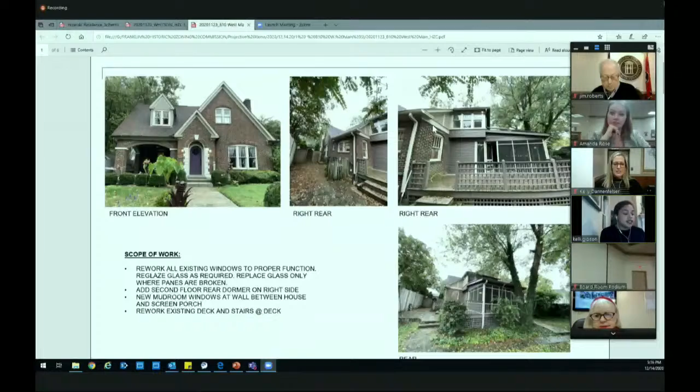The proposed shed dormer has wood siding and will include two wood windows. The dormer is located on the side elevation of the dwelling and is obscured from public view. Stylistic elements are compatible with the existing dormer located on the rear of the dwelling.

The scope of work also includes in-kind repair of existing historic wood windows and replacement of the existing rear deck and stairs. The proposed window repair and deck replacement are consistent with the guidelines, which recommend that dormers be added to rear or side elevations with minimal visibility, using designs, materials, and scale in keeping with the building character.

The proposed windows are consistent with the guidelines, which state that addition windows should relate to the window materials found on the existing structure and recommend against placing new window openings on primary or readily visible secondary elevations. The guidelines also recommend new windows have historic profiles and dimensions. The dormer design, location, and materials are consistent with the guidelines.

It is recommended that the Historic Zoning Commission approve with conditions the proposed dormer construction as follows: the windows on the dormer addition must have historic profile and dimensions and consist of either wood or a composite material with the appearance of wood. The window specifications must be approved by the preservation planner or the commission prior to issuance of a building permit. The application must meet all requirements of the Building and Neighborhood Services Department prior to issuance of a building permit, and any additional changes to the approved plans must be returned to staff or the commission for review and approval. Thank you.

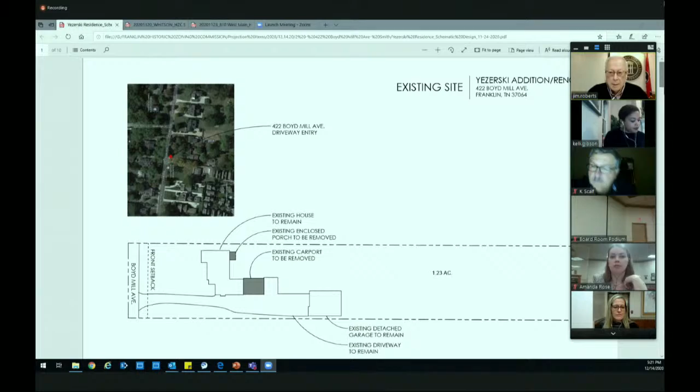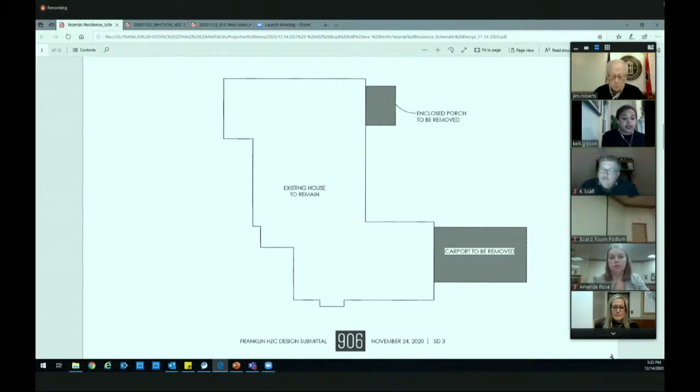The applicant is requesting a certificate of appropriateness for a series of work at 422 Boyd Mill Avenue as follows: demolition of the rear enclosed porch and carport, and a single-story addition to the rear elevation of the house. So we're going to consider the partial demolition first. The applicant appeared before the Design Review Committee at its November 16th, 2020 meeting. The proposed partial demolition consists of the existing enclosed porch and carport located on the rear elevation of the house.

The applicant included photographic documentation for the proposed partial demolition in the application materials. The construction date of the enclosed porch and carport is unknown, but these building portions do not appear to be historic. The guidelines recommend against the demolition of historic buildings and structures. In this case, the proposed demolition is limited to the porch and carport and will not have an adverse impact on the district.

It is recommended that the commission approve with conditions the proposed partial demolition as follows: the applicant must meet all requirements of the Building and Neighborhood Services Department prior to issuance of a building permit, and any additional changes to the approved plans must be returned to the commission for review and approval. Thank you.

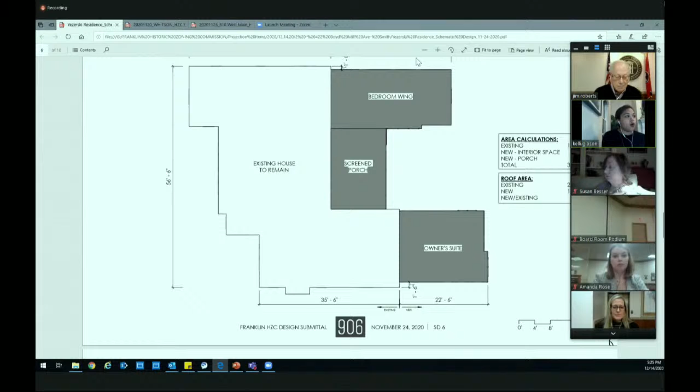The proposed addition includes new wings to the home and a screen porch. The addition will be clad in cement fiber Hardie siding with a 7-inch reveal. The addition is differentiated through a minor roof break, inset, and a material change, and includes new windows on both elevations.

The windows appear to have historic dimensions, but the applicant did not include window specifications in the application materials. Architectural details, including the windows, window grids, and trim, are consistent with the historic portion of the home. A small band of foundation brick on the addition will match closely to the color of the existing stone on the home. The addition represents a 59% increase to the existing building footprint, and the proposed building coverage is 8%.

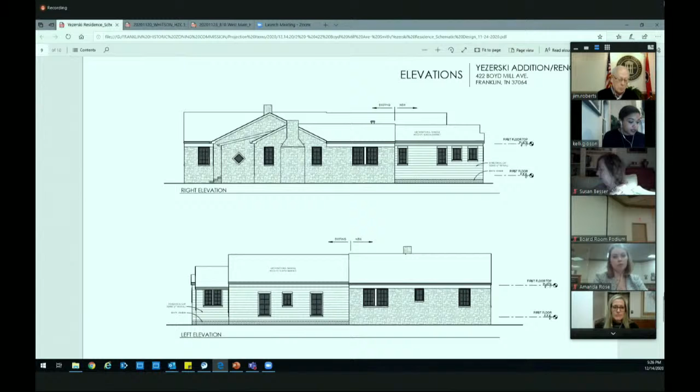The guidelines state that additions should support the historic character of the district and recommend that additions be placed on rear or obscured elevations. Furthermore, the guidelines recommend avoiding approaches that unify the existing structure and new construction into a single unified whole. Differentiating methods such as roof breaks, insets, offsets, and material changes should be incorporated into the design to separate existing construction from new construction.

The location of the addition on the rear elevation of the home and the use of building insets, a roof break, and a material change to differentiate the new addition from the historic home are consistent with the guidelines. The proposed building materials are also consistent with the guidelines, which recommend that additions be compatible with the proportions, form, materials, and details of the building.

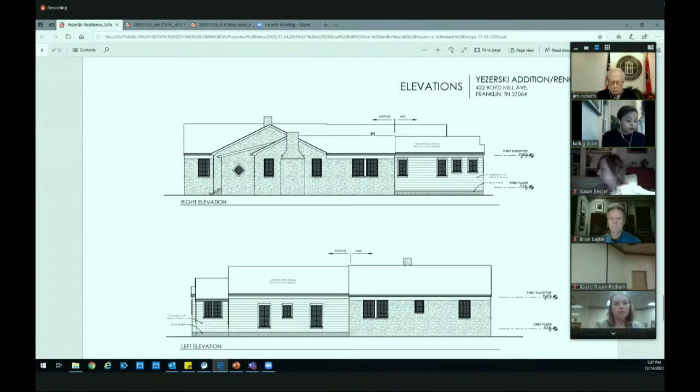Lap siding should be consistent with the principal and adjacent historic buildings. The use of a 7-inch lap reveal is mostly consistent with the guidelines, as there are examples of homes with a wider lap reveal located on the street, and the context of the neighborhood lends itself to this style of reveal.

The guidelines recommend that the square footage of additions be limited to no more than half of the existing footprint, and that maximum building coverage should not exceed 35%. The proposed addition is consistent with the guidelines for building coverage, but the footprint size, 59%, is larger than the recommended 50%. For this reason, the proposed addition size is not consistent with the guidelines.

It's recommended that the commission deny the proposed addition with the following conditions. If issued a COA, the application must meet all the requirements of the Building and Neighborhood Services Department prior to issuance of a building permit. If issued a COA, the windows must have historic profiles and dimensions and consist of either wood or a composite material with the appearance of wood. The window specifications must be approved by the preservation planner or the commission prior to issuance of a building permit, and any additional changes to the approved plans must be returned to staff or the commission for review and approval.

Thank you. Would the applicant then like to comment on this portion of the application?

Yes, sir. While the new to existing roof ratio is 59%, in excess of the recommendation of 50%, we are asking for consideration based on the following. Number one, the large lot size is 1.23 acres and a low lot area coverage ratio of 8%. This ensures ample open space around the house.

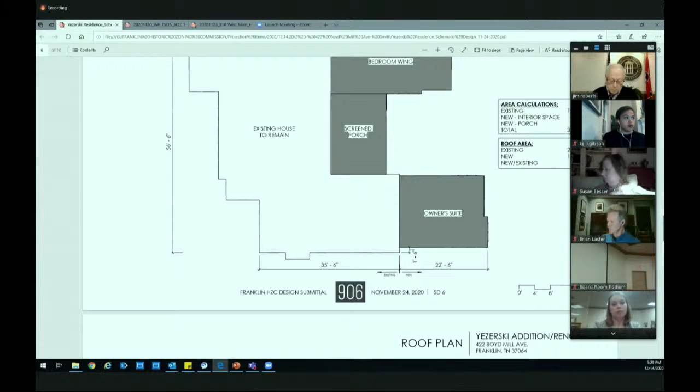The proposed addition does step back from the main house so that it is very minimally visible from the street, as you may have noticed in the proposed perspective views. The design was modified following the DRC comments in order to further differentiate the proposed new addition from the existing and to step it back from the plane of the existing house. Thirdly, the scale and design of the proposed addition is appropriate to the existing home.

With the front elevation view, no portion of the addition is visible. The owners, I've worked closely with them in developing a design. They really love living in Franklin and living in the historic center, and they look forward to continuing to raise their growing family here. I worked with them to develop a plan that complies with the spirit of the historic zoning guidelines and respects the original house, while bringing the house up to date to meet today's functional requirements. So I hope that the committee takes these points into consideration.

Thank you very much. Thank you, Matt. Are there any citizens that wish to comment on this portion of the application?

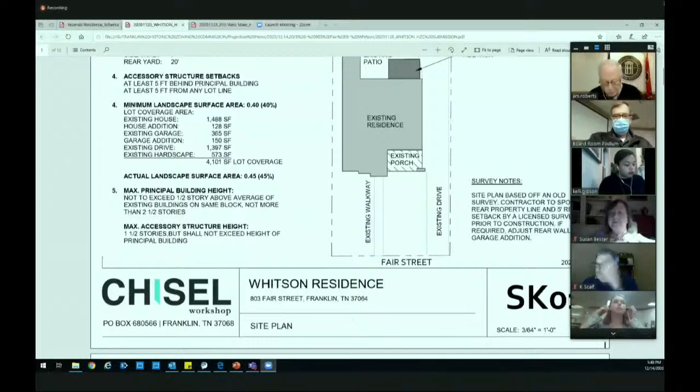So first we'll consider the additions, and then we will do the retaining wall. This is the addition to the principal building.

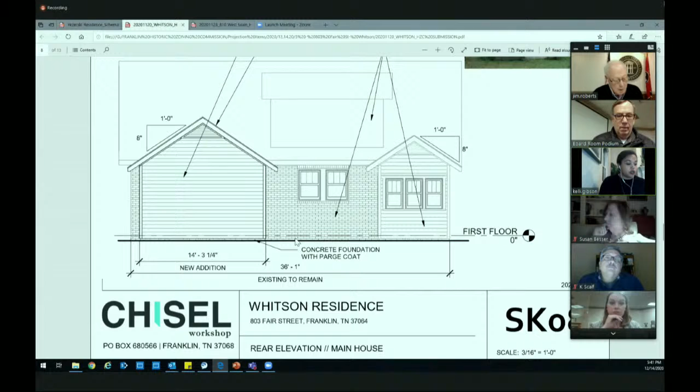The applicant proposes the construction of a single-story front gable addition on the rear elevation of the dwelling. The addition features wood siding, a concrete foundation, a single wood window, and trim detailing that match the existing house.

The guidelines state that appropriate locations for additions are on rear or obscured elevations, and recommend avoiding approaches that unify the existing structure and new construction into a single architectural whole. Furthermore, the guidelines recommend the use of differentiating methods such as roof breaks, insets, offsets, and material changes to separate existing construction from new construction.

The guidelines also recommend that addition square footage be limited to no more than half of the square footage of the historic building, and maximum building coverage should not exceed 35%. The addition is differentiated through the use of a lower roof line and a material change. The location, materials, design, and size of the addition, which is 8% of the building footprint, are consistent with the guidelines. The existing building coverage is 25%, and the proposed addition would increase the coverage to 26%. This increase is consistent with the guidelines, which recommend that building coverage not exceed 35%.

The accessory addition, here we are. The circa 1930 brick garage is located southeast of the dwelling and is a contributing structure to the historic district. The proposed single-story side addition includes a concrete foundation, wood siding, and trim details that match the existing house. The addition will also include double-hung wood windows, seen here.

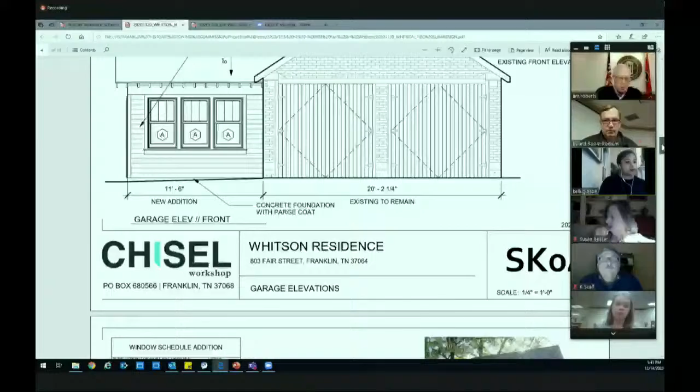The guidelines recommend that historic outbuildings be preserved and maintained, and state that appropriate locations for additions are rear or obscured elevations. The guidelines do not differentiate between the recommended percentage and scale of enclosed additions proposed on principal structures versus accessory structures, and recommend that the square footage of additions be limited to no more than half of the square footage of the historic building.

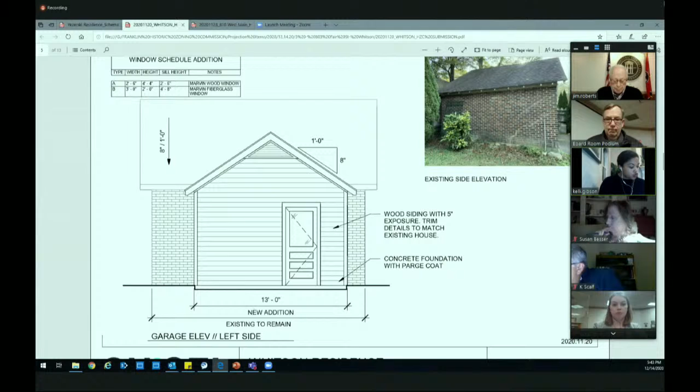The guidelines also recommend avoiding design approaches that unify the existing structure and new construction into a single architectural whole, and recommend the use of differentiating methods such as roof breaks, insets, offsets, and material changes to separate existing construction from new construction.

The proposed addition is located on a side elevation that is obscured from public view by the principal dwelling and measures 41% of the existing historic building. The addition is differentiated through a roof break, building inset, and material change. The addition's design, placement, and materials allow it to read as a distinctive form from the existing structure.

The building coverage is 25%, and the proposed accessory addition would increase the building coverage to 27%. The total proposed building coverage, including the addition to the principal structure, so everything together, is 29%. The proposed accessory addition materials, size, and design are consistent with the guidelines.

One moment. Here we are.

For the principal addition, it is recommended that the commission approve with conditions the proposed addition as follows: the windows must have historic profile and dimensions and consist of either wood or a composite material with the appearance of wood. The window specifications must be approved by the preservation planner or the commission prior to issuance of a building permit. The application must meet all requirements of the Building and Neighborhood Services Department, including standards for landscape surface area, prior to issuance of a building permit. Any additional changes to the approved plans must be returned to the commission for review and approval.

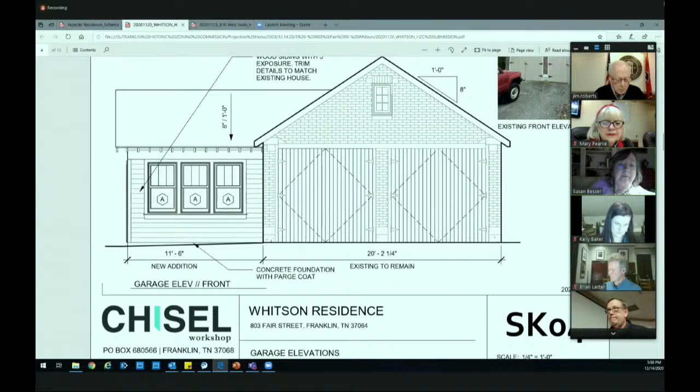I thought there was a window. Ms. Gibson, would you mind pulling up that elevation, please? Oh, I see what you...

I concur with Ms. Besser's comments. I had seen that too and wondered about it. You're not going to see it, it's just the homeowner and visitors that are going to see it. But if it were possible to break up that wall, I'd concur. Okay, that's a bathroom, right?

Mr. Whitson, you want to comment on that? Yes, we had the same concern. Actually, it will be kind of divided between where the roof pitches and that main wall. We also have a trellis used before in that location, and we can use that. There will be something appropriate and complimentary placed on that wall, with a sidewalk in front and an opportunity to grow flowers. I'm not an expert, but we have a miniature magnolia we'll put there on that trellis against the wall.

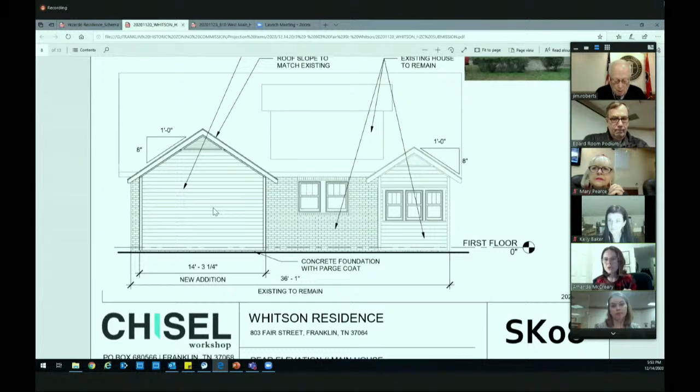Mr. Chair, this is Amanda McCreary. Can I speak for just a moment? Absolutely, please do. So, I appreciate y'all's comments. We're definitely trying to keep the addition in a very tight footprint, and by doing so, to have a tight master bathroom with universal design for aging in place. It did not lend itself to any windows on the back, so we dropped a window on the side to get some natural light in, but that was also a direct result of trying to keep it in a small footprint. If you look at one of the photos, you can see the existing trellis that Representative Whitson is discussing. So there will be some greenery and green screening to help that facade not feel so blank.

Thank you, I appreciate that. Any other comments? From a staff perspective, when I reviewed this initially upon receiving it from Ms. McCreary on behalf of the Whitsons, I noted that because it faces the rear elevation, I feel strongly it could support a window, but it wouldn't be necessary from a fenestration standpoint.

All right, thank you. Any other comments? Hearing none, I think you're ready to vote to approve as presented. Please respond when I call your name. Kelly Dannenfelser? Aye. Susan Besser? Aye. Jeff Carson? Aye. Mike Hathaway? Aye. Brian Miller? Aye. Carol Marquardt? Aye. Mary Pearce? Aye. Ken Scalf? Aye. And Jim Roberts, aye.

All right, the next piece of this is the steps in the front. Kelly Gibson? Thank you, Mr. Chair. One moment.

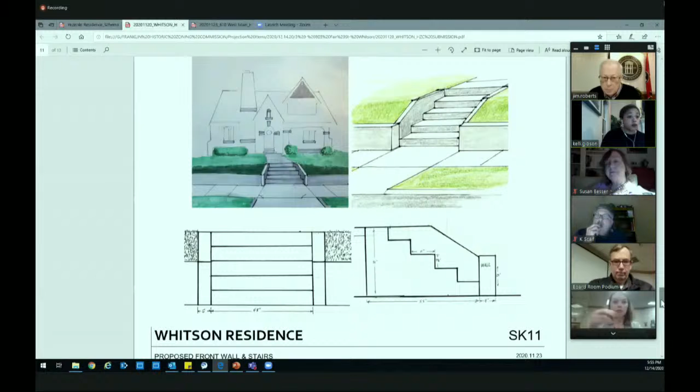The applicant has submitted photo samples of existing concrete retaining walls located within downtown Franklin, some of which are located outside of HPO. The concrete wall would be in keeping with the Tudor revival style of the home, as new brick may be difficult to match to the historic brick on the building, and stone would introduce a new material to the property. It is recommended that the commission approve with conditions the proposed retaining wall and steps as follows.

Handrails will be required to meet code's requirements. The handrails should be composed of metal for consistency with the guidelines, and the applicant shall submit the final design of the handrail to the preservation planner for review and approval. The application must meet all the requirements of the Building and Neighborhood Services Department, and any additional changes to the approved plans must be returned to the commission for review and approval.

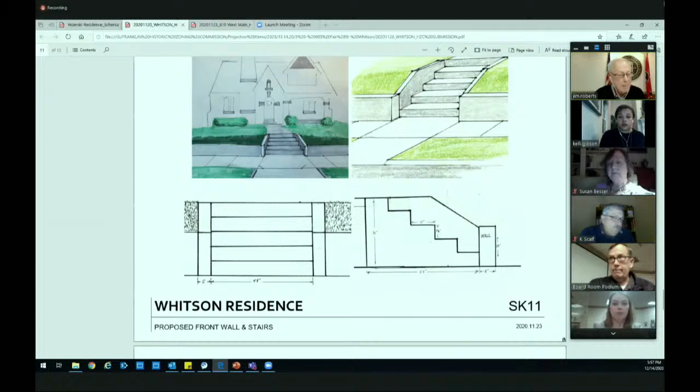Okay, would the applicant like to comment on the steps? Well, the problem, if you go with cheek walls—if you go back to the photos, I don't think any of the cheek walls that were built in the 1930s had handrails. And as you can see, the steps are wide enough. If you go back to the photos around town, you'll see that traditionally cheek walls were built with the older homes, and there's not a provision or really a way to put handrails on those. We were trying to keep this in character with the homes built back in that period in the 1930s.

Are there any citizens that wish to comment on this application, on this part of the application? All right, hearing none, then commissioners need a motion.

Mr. Chair, this is Ken. I move to approve with conditions a certificate of appropriateness for proposed retaining wall and steps. Thank you. Is there a second? Second, it's Jeff. Thank you, Jeff.

Okay, questions, comments? May I note something quickly, please? Yes, please, Amanda. I did want to mention that I completely understand Mr. Whitson's point, but unfortunately the Historic Zoning Commission wouldn't be able to supersede the hand railing condition. That would be something I would recommend that Representative Whitson work with the Building and Neighborhood Services Department to attempt to resolve. We wouldn't be able to make a condition of approval that would require that not be placed in there.

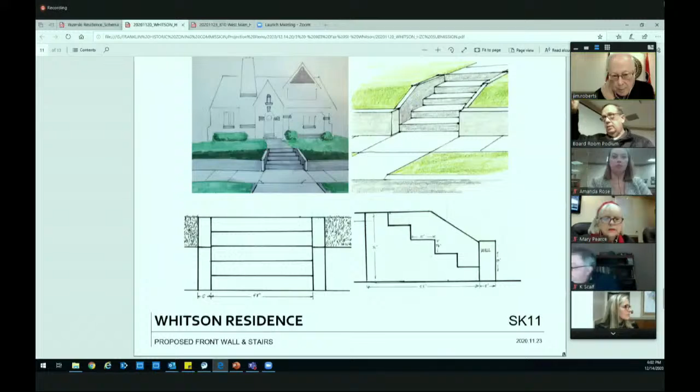All right. Are there any other comments? Yes, Mr. Chairman. Yeah, Sam.

The one reason we looked at concrete rather than stone is there's no stone on this house at all. The foundation is concrete, and I highlighted in the drawing a lot of this, you see it's either concrete or cut concrete accent to the house. Also, the structure down the street has a small 2-foot retaining wall made out of concrete, so it's kind of in keeping with the period of the house, and the concrete actually enhances it, whereas most of the stone I've seen looks new and would detract from the appearance of the house.

Okay, are there any other comments? We have a motion on the board to approve as presented. Any other comments? I have a comment, please.

We did fail to note that a capstone might need to be added to this wall, either a concrete one or perhaps even a stone one, in respect to Ms. Pearce's point, that would be more indicative of what you'd see on historic walls. But it's not a condition of approval—this is something we forgot to note.

I would concur with that. Mr. Chair, can we see a picture of the front of the house again? Kelli Gibson, can you pull up the front of the house with the front that shows the stairs as currently shown?

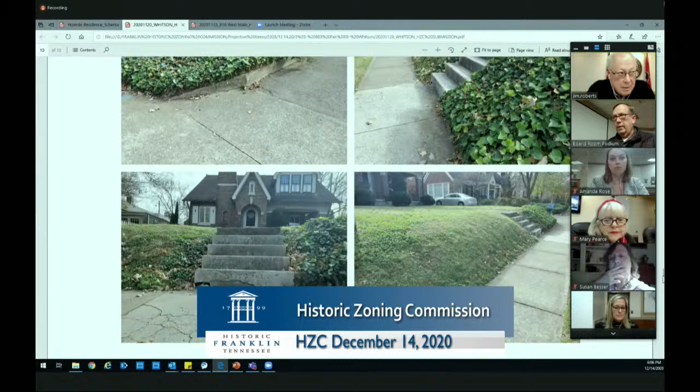Ms. Gibson, could you scroll to some of those examples that the applicant provided? You see, none of those have that. Right, they don't, and they look very modern. They don't have them, and I think they generally look very modern. I think landscaping spilling over softens and helps.

Some of those are quite old, those retaining walls that you see there. And one of them is actually a new one.

Let me ask, is it possible to separate the wall from the steps so the steps can be replaced? We can always work on the wall later. Well, I think we can put all this together. Is there any other commissioner who has any other comments?

Or is there an amendment on this capstone? Hearing none, then let's vote on the steps and the wall as presented.

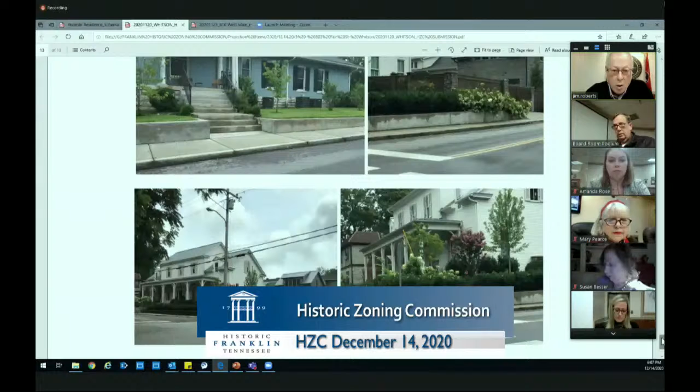So please respond when I call your name. Kelly Dannenfelser? Aye. Susan Besser? Aye. Jeff Carson? Aye. Mike Hathaway? Aye. Brian Miller? Aye. Carol Marquardt? Aye. Mary Pearce? Aye. Ken Scalf? Aye. Jim Roberts? Aye.

You're good. In clarification, that was the amendment vote? No, that's it, as presented. No, there was no amendment. That's what I was thinking. Okay, thank you.

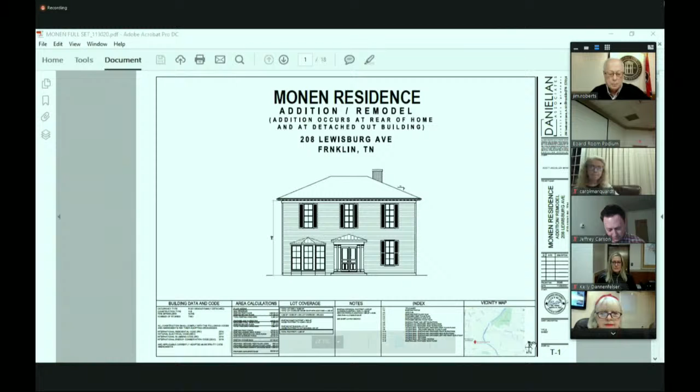Good evening, everyone. The applicant is requesting consideration of an addition to the principal structure and additions to the accessory structure, as well as some alterations at 208 Lewisburg Avenue. I'm going to share my screen. Can everyone see the screen? I'll walk through really quickly. The series of work includes the following: a one-story rear addition to the principal structure. This is the view right now, and it would be an addition reworking this area and then coming off here.

I'm sorry, I've got a little bit of an echo. I think my colleague's fixing that for me.

The construction of an upper level addition to this accessory structure, which is behind the house. You can see the rear of the house here, and the accessories over in this area. The addition would be a slight extension forward of this front wall to allow for additional living space, as well as an upper story addition across the entirety of the existing structure.

The elevation of the grade at this area, as the applicant has indicated, is a depressed condition, and they are worried about water issues here. So elevating this existing wing of the accessory structure upward in order to get it out of that depressed condition.

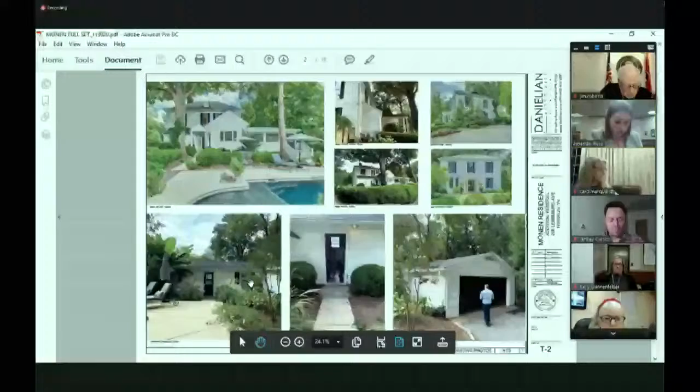The reconfiguration of the fenestration pattern on this existing building, as I'll show on the elevation set momentarily, and the replacement of the aluminum siding on both the principal structure addition area and the overall accessory structure. It is all in aluminum siding, and they would like to replace that with a smooth cementitious siding.

The guidelines recommend that additions are designed to be clearly compatible yet differentiated with the proportions, form, materials, and details of the building, and be limited to no more than 50% of the footprint of the original building. The historic building must include all portions at least 50 years in age, and it must be clearly identifiable, with its physical integrity not compromised by a new addition, through approaches that unify the existing structure and new construction into a single architectural whole.

The guidelines support the placement of additions on rear elevations or obscured elevations with limited visibility, noting however that some elevations may not be appropriate for additions as they will have visual prominence from many vantage points.

The applicant's proposing to reconfigure this area, which is an existing non-contributing shed addition at the rear, in order to provide some additional space.

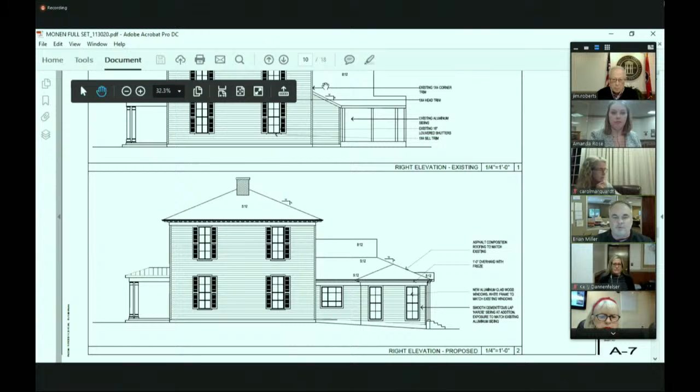Most of those will be addressed in the accessory structure we'll get to next. But we did reconfigure the space a little bit, and tried to reorient the windows that were very small, square windows, to be more in proportion with the historic nature of the existing home, with very simple massing.

Part of that was flipping some of the interior spaces. Whereas before the master only had a single historic window, which we did not want to impact, that has now become the zone of the bathroom closet so that the master could be at the rear, capitalizing on the views and allowing us to use larger proportional windows that worked for the bedroom versus the bathroom. All in all, it was an improvement to the design.

And I think it accommodated some of the concerns of a few of the commissioners. Would you like me to make the recommendation for a motion? Yeah, that'd be great. Okay, thank you.

It is recommended that the commission approve with conditions the principal structure addition. The windows for the addition must have historic profile and dimension and consist of either wood or composite material emulative of wood, and those specifications must be submitted to staff for review and approval prior to issuance of any permits. The foundation material specifications must also be submitted to staff for review and approval in light of the guidelines prior to issuance of a permit, and must meet all requirements of the BNS department. Any changes must be returned to the preservation planner or the Historic Zoning Commission prior to work commencing for review and approval.

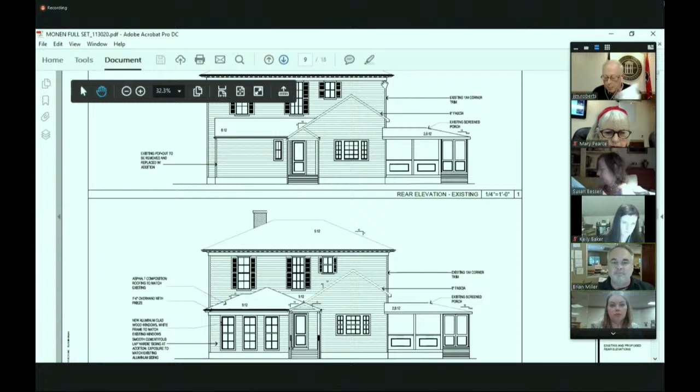Amanda, you might be able to go to the last sheet, which is a roof plan. Or whoever has control, I'm sorry. Amanda's got it, keep going all the way to the very last page, I believe it is. Kind of threw them in at the end. Here you'll see in the bottom right corner that articulation of the hip that pulls forward steps back before it hits the main structure, so the roof does not stick forward of where it engages it. If that helps understand the condition.

Very helpful, thank you. Yeah, we certainly don't want the roof standing proud of that from the front view. All right, any other questions?

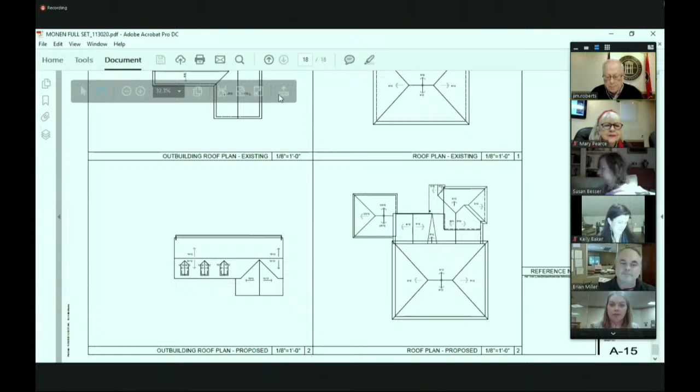We're ready to vote then on the principal structure. We've got a motion to approve as presented. So just please respond when I call your name. Kelly Baker - Aye. Susan Besser - Aye. Jeff Carson - Aye. Mike Hathaway - Aye. Brian Miller - Aye. Lisa Marquardt - Aye. Mary Pearce - Aye. Ken Scalf - Aye. And Jim Roberts - Aye.

All right. Now we're on to the accessory building. Amanda, it's back to you. Yes, thank you. So as far as the accessory, I'm going to share my screen again so I can help explain as we go along. Just a moment.

The subject accessory structure is of circa 1970 construction and is not currently contributing to the Lewisburg Avenue Historic District in age, although it is pretty diminutive as far as the design goes currently. In the case of alterations to non-contributing buildings, the alterations are reviewed in light of the guidelines, specifically in relation to how the proposed alterations would impact the character of the district and the surrounding structures.

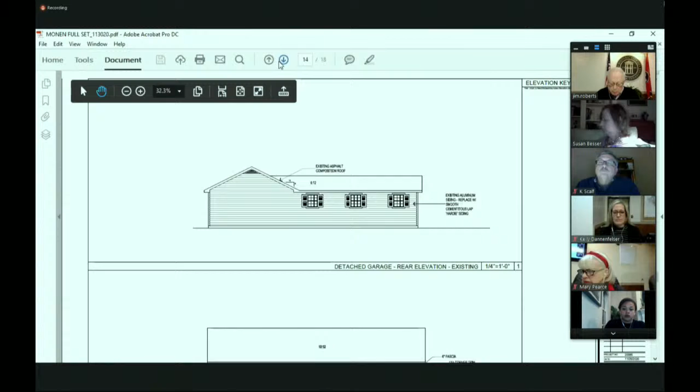The proposal is being discussed in two different portions. The structure is configured in an L shape, which is a little difficult to see here, but this is a wing and this is a gable front that projects outward. I can go to the roof plan just to show you quickly. Here's the wing, here's the garage portion that extends outward. So because of that, I'm speaking to it in a couple of different ways.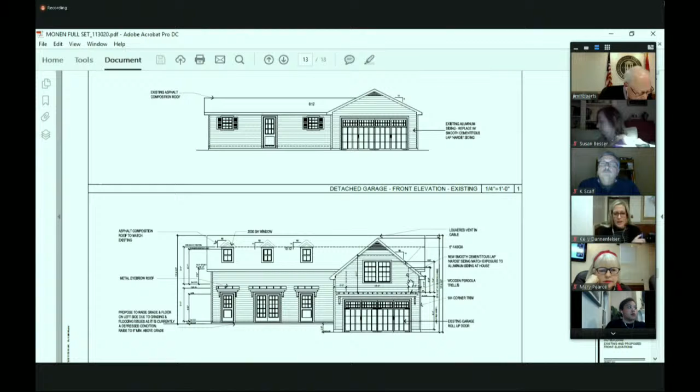The proposed addition would consist of the side-facing portion with the 3 front-facing gable dormers that you see here on the quote-unquote wing portion, and then the other portion is a front-facing gable that you see here over the garage.

So in discussing the wing portion with the side-facing gable, this addition proposes some linear square footage both upward and lower on the ground level. The lower enclosed area was previously discussed at a DRC meeting as being a proposed porch, so the upper story would cantilever over, creating a porch underneath, but it has since been enclosed due to concerns about the porch itself.

So this portion of the building is proposed at a height overall from grade to here of 21 feet, 8.5 inches as viewed from the street. The applicant has indicated that he would like to raise this floor on the wing side only to address a grading issue, and 8 inches of elevation has been included in the calculation in order to address that.

The structure will read full height from the rear elevation, so 21 and 8.5 here. If you go to the rear elevation, you will read it full height, and I will show you why - you can see the raising of the conditions here. So it will read shorter from the front than it does from the rear.

While the dormers are only set back 1 foot from the front wall - you can see the applicant's called out 1 foot from the front wall and then 1 foot from the eave that extends outward - this is contrary to the recommendations of the guidelines, which say that dormers be set back 2 feet as a minimum from the exterior wall. They do help reinforce the scale of this portion of the addition as a 1.5 story form.

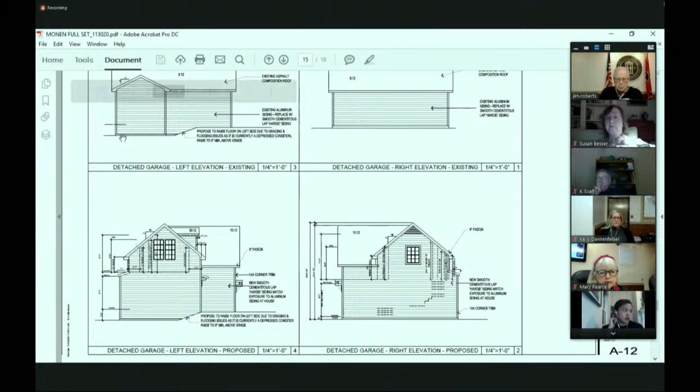We'll go back to the front again. This thus emphasizes the subservient relationship between the accessory structure and the principal structure it serves, which is a 2-story structure. The removal of the previously discussed porch is appropriate, as this modification lessens the building's overall appearance as a secondary principal structure on the lot.

As for the front-facing gable over the garage, this portion measures 23 feet, 8.5 inches to ridge, so there's about a 2 foot difference here where this is being elevated. As such, the overall building is approximately 8.5 feet shorter than the principal structure, and the overall decrease in height from what was previously submitted is about 4 feet.

The proposed upper story addition's scale and height are lessened by the removal of the gable form from the rear elevation, which I will show here, as the applicant had originally had a gable form here. But with that removed, it does lessen the perceived height of the elevation and will lessen the structure's presence for adjacent buildings on the street behind Adams Street.

Both portions of the proposed addition are inset from the facade by 2 feet in order to comply with zoning setback requirements. So here you see a slight inset from the existing wall upward, because the property is 3 feet off the property line, or the building is 3 feet off the property line, and setback requirements require that any new construction be 5 feet off the property line.

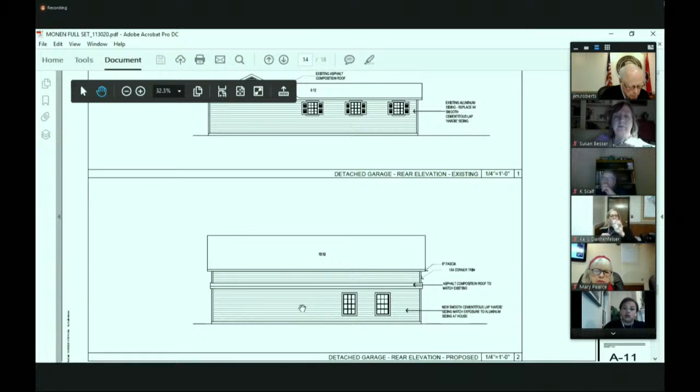The applicant is proposing to utilize siding to lessen the foundation appearance from the rear. So the siding will go all the way down to the necessary requirement here, which is probably 18 inches.

The applicant is also proposing to remove this aluminum siding from the entirety of the structure. Because this is a non-contributing structure, its removal and replacement with cementitious siding, as I discussed for the principal structure, is appropriate. The fenestration pattern is proposed to be altered overall, the entirety of the structure. As a non-contributing structure, these alterations are appropriate.

The general rhythm and spacing of the proposed fenestration are mostly in keeping with the intent of the guidelines, though the use of multiple doors on the front face does continue to cause some potential consideration of this as a secondary principal structure, however.

The use of the cement board siding, asphalt shingle roofing, are all consistent with the guidelines. The exact window, door, and roofing specifications have not been submitted for consideration, however. When I say roofing, I think I misspoke, because it is indicated to be asphalt shingle.

The wooden pergola proposed on the front-facing gable portion above the garage door is in keeping with previous approvals by the commission, and its placement helps break up the mass of the front-facing gabled form. The use of standing seam metal for the eyebrow roof material would be appropriate and consistent with the district and surrounding area.

All right, other questions? Mr. Chair, this is Susan. I don't have this elevation from when we talked about this before, so I don't know exactly what was changed. But what I did hear was that the roof line was lowered, and I'm still feeling that it reads like a principal dwelling. But I do acknowledge that it has been changed quite a bit. Yes, it's been lowered 3 feet 4 inches. I've got the original in front of me too. Okay, thank you, the original drawing.

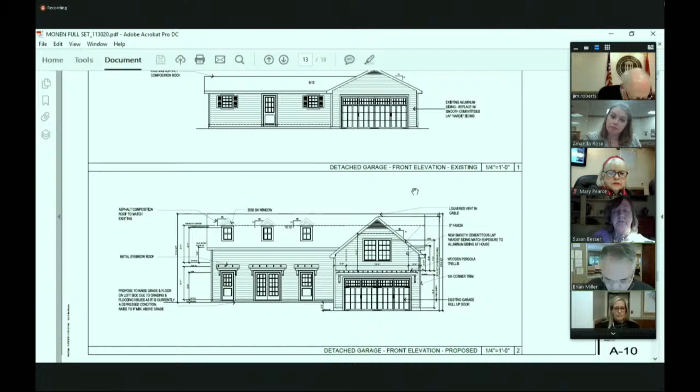What is the square footage of this structure compared to the historic home? Do we have that somewhere, Amanda? I did not include that, but Mr. Miller can speak to it. Correct, the existing square footage of the primary residence is 3,463 square feet, and the garage as it was before was 971 square feet. The addition we're proposing, both first and second floor, is 1,446. So in aggregate, it's less than half the size of the main residence.

So let me make sure I understand - that 1,446 then includes the existing garage, right? Absolutely, that's in total. So we're adding about almost 500 square feet to the structure, both the second floor and the first floor. Does that answer, Mary? It does. It's somewhat concerning because it's probably as large as the houses on Adams Street, but in the complete context of everything, I think this is going to work okay.

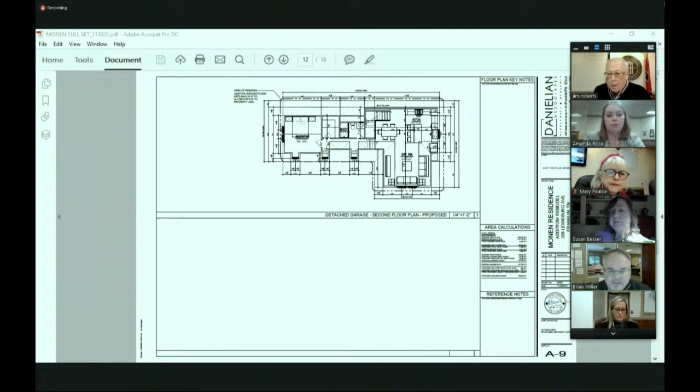Thank you. I think there was a front elevation view where it's quite obscured from the street. And the neighbor to the left has an accessory structure that's actually very similar in scale, so we've tried to keep that in mind.

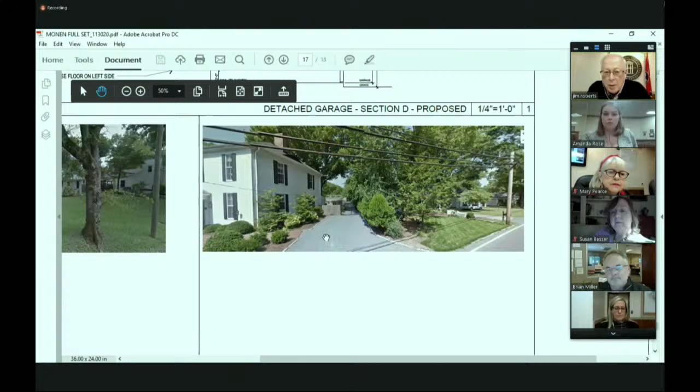Other questions? Mr. Chair, I think all the concern about this is not from Lewisburg. I think it's from Adams. Yes, sir, and I walked down there to look at it myself, so I've seen it. I think the adjustments he's made and the height over the garage, that lowering of 3 foot 4 inches, has made a big difference. I appreciate the perspective you've shown from Adams Street now that I'm looking at it. So I think it's all right.

And speaking to Mr. Miller, I did note too that removing the gable form that was proposed at the last DRC is dropping your eye down as well, so it won't read as tall, nor is it actually as tall as what was discussed at DRC. There's actually a gable form in the existing structure that reads taller than it does with the second floor added because of that. Other questions?

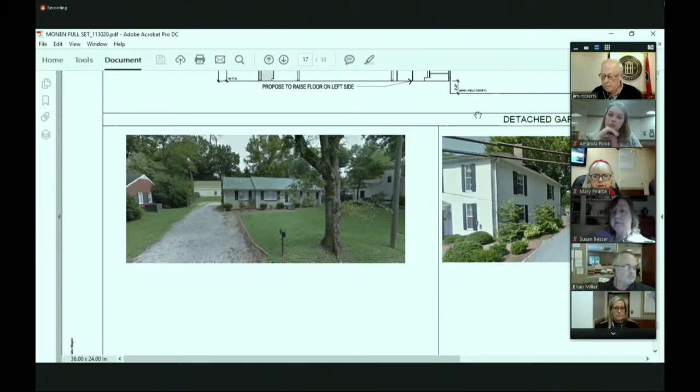Hearing none, then are we ready to vote? I guess we are, so please respond when I call your name. Kelly Baker - aye. Susan Besser - aye. Jeff Carson - aye. Mike Hathaway - aye. Brian Laster - aye. Lisa Marquardt - aye. Mary Pearce - aye. Ken Scalf - aye. Jim Roberts - aye.

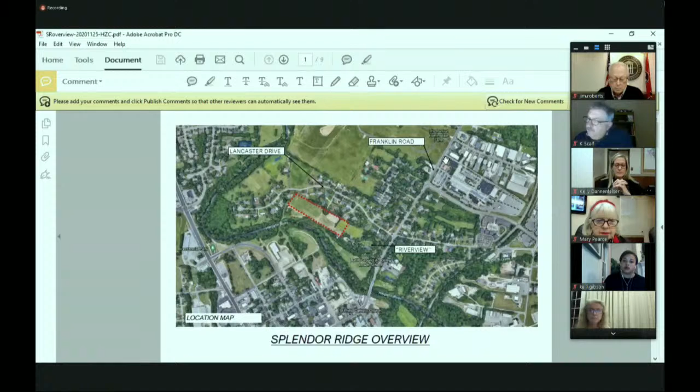To go a little further, here is the layout for Splendor Ridge subdivision. You can see that there are 19 lots. The ones being discussed tonight are lots 9, 10, and 11, located at the intersection of Parsons Place and Splendor Ridge Drive.

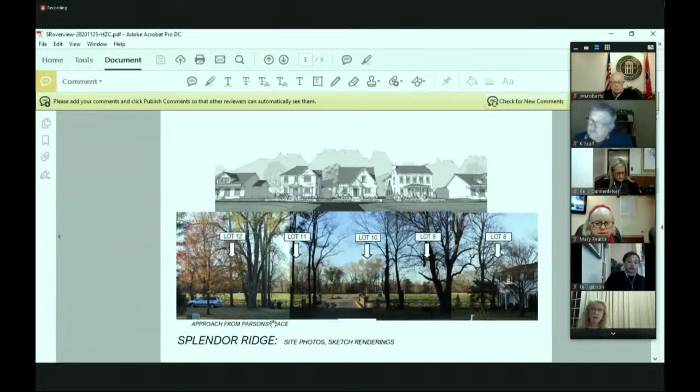The applicant has done an excellent job of providing streetscapes for discussion that would help orient staff, the community at large, and the commissioners on where the buildings are and how they'll be situated. You can see this approach is Parsons Place as it ties into Splendor Ridge. You see existing homes here on either side. Lot 9 is located here, Lot 10 here, and Lot 11 here. This is the highest part of the development. The grade of the street rises up, hits here, and then falls off on either side and behind toward the river.

The applicant has provided a side view with the streetscape as well. The first discussion we'll have is on Lot 9, which you can see located here.

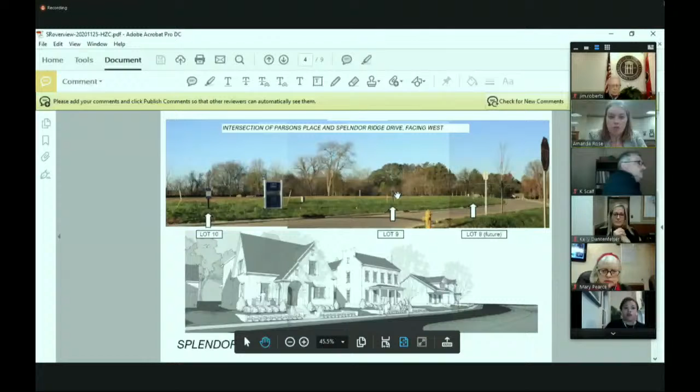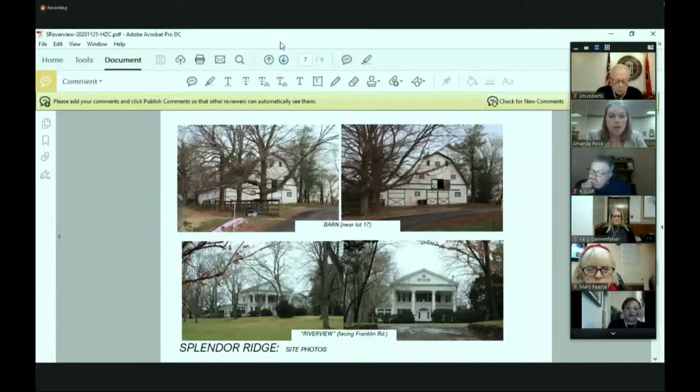And here's some other photographs of the context area. This is a barn situated at Splendor Ridge subdivision, the existing barn on the property, as well as the Riverview Mansion itself. Here are some other properties located on Franklin Road. The BGA property is located right across the street from Riverview, and these are some other homes located very close by in the area.

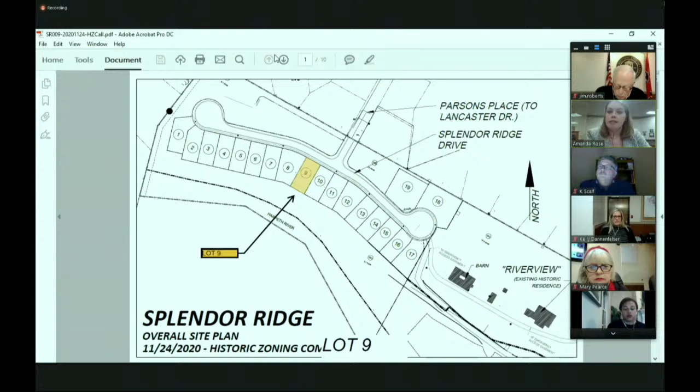The guidelines recommend that new construction be designed to be compatible in massing, heights, proportions, scale, size, and architectural features of adjacent buildings, and that new construction complement rather than detract from the character of the historic building. The Franklin Road Historic District includes several properties.

I did show a number of photographs of those just a moment ago, but it does include things like Jasmine Grove, Wyatt Hall, the Truett House, the McElmahan House, Battleground Academy located across the street from this property, Riverview itself, Roper's Knob, the factory, Harlinsdale Farm, many of which are listed on the National Register of Historic Places.

So the district represents an array of architectural styles. All those buildings are very different from one another. And those styles include things like Victorian, Greek Revival, Folk Victorian, Neoclassical, Bungalow.

It runs the gamut. Some of the key architectural features of this corridor is that it includes residential and agricultural buildings from the 19th and 20th centuries, with the exception of a couple of the higher style homes. Many tend to be more vernacular in approach, and it has a mix of rural and roadside development.

The applicant's proposing the construction of a federal style residence, as you see on the screen here. It has a 3-bay porch and an attached garage at the rear of the driveway. It is 2-level, and then at the rear is a 2-level partially enclosed porch that would overlook the area by the river.

The proposed scale of 2 stories is an appropriate scale for the Franklin Road Historic District. It also is consistent with that preliminary COA. And as I mentioned, that retaining wall helps lessen that foundation height, softens the perceived building massing and height.

The guidelines recommend that in areas where historic garages are generally detached, the new garages should appear detached. Attached garages should be designed in such a way that they are located at traditional locations behind the rear plane of the house, and otherwise not visible from the street. So what the applicant has done for all 3 proposals tonight is an attached garage, but it has the visibility from the street of being a detached garage.

And I'm going to go ahead and go to the site plan view so you can see that. This is the driveway and here's the garage. So it is attached. It's not technically semi-detached because it is attached through enclosed conditions, but it has the appearance of being detached from the street, which is consistent with the intent of the guidelines.

The overall height at 38 feet 6 inches is consistent with the preliminary COA. The applicant did heed the DRC's recommendation to reduce that foundation height. And the materials are consistent with the guidelines.

You do see here that the prominent material is brick. You also have lap siding on the sides with a 5-inch reveal, wood porch railings, fiber cement panels here at this partially enclosed upper story porch. The trim is also fiber cement. Asphalt shingle roofing, with metal roofing at the porch on the front.

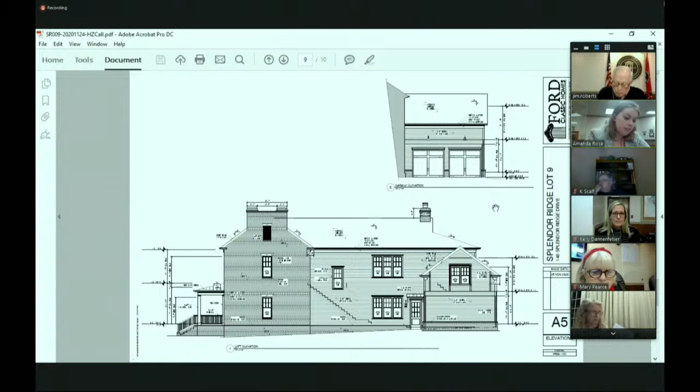Building coverage is at 39%, which is not consistent with the guidelines. The guidelines recommend that maximum building coverage not exceed 35% in specified residential districts, including R1, where the subject property is located. So with that, staff must recommend denial of the proposed construction because of the lot coverage being proposed at 4% more than recommended by the guidelines.

However, if issued a COA, the following would need to apply: the paired internal brick chimney heights must be altered to better meet the intent of the guidelines, as well as to meet any applicable code requirements. The raised brick and rowlock design at the bottom of the garage needs to be lowered to no more than 18 inches for better consistency with the guidelines.

The lap siding must be wood or smooth face cementitious material. The window specifications must be submitted to staff for review and approval prior to issuance of a permit. The guidelines also state that one should match surrounding historic masonry in width of mortar joints, size, scale of bricks, color, etc. And if issued a COA, the specifications for that retaining wall must be submitted to the preservation planner or the commission prior to issuance of a building permit. Thank you.

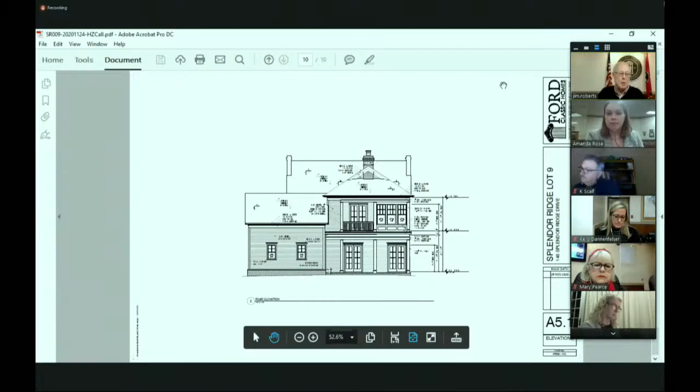Yes, thank you. Thank you all for your time tonight. Thank you, Amanda, for your synopsis. I'm Chad Gore, representing Ford Classic Homes, the applicant. Amanda did a good job as usual, recapping everything. I think we were able to address a lot of, if not all of, the comments from the DRC, and I don't think we take any exception to the staff's comments, save one.

I'll leave myself open for some questions about any of that specific stuff, but I do want to make sure to address the lot coverage. That's something we hope to ask your consideration for an exception to. There's a few things that we think are in our favor in asking for that exception.

One, the 35% coverage just isn't quite sufficient to accommodate the kind of houses we think are going to be appropriate for the project. Some things we want to make sure we are able to include are like masters on the main level, covered porches on the front, covered entries, covered porches on the back, and that stuff all just kind of adds up so quick. You run out of coverage before you know it. But in this particular project, I think we've got some conditions that maybe help us get to that.

This isn't a singular infill application. We're talking about something between two historic properties, so it's more of a development unto itself, a little bubble down there. Within that development, there's already a lot of platted open space - by my quick calculations, about 7 acres, both across the street from these lots and behind them toward the river.

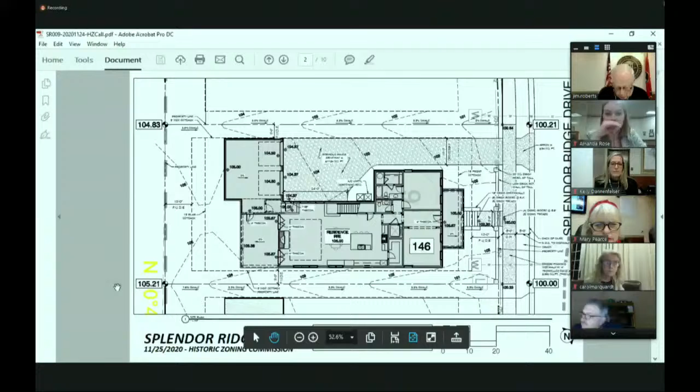It may be appropriate to look at the site plan as we talk about this. Our intention - and I'm speaking generally since this is an exception we're asking your consideration on for all 3 of these lots, and almost all the lots going forward - you can see the driveway going down one side, set up this way.

The main mass of the house is 37 or 38 feet wide, leaving about 22 or 23 feet over to the next house. So these houses are set up so the main mass doesn't take up the entire width of the lot - we're left with open space between lots as you drive down the street.

In the same vein, the lots themselves are oriented perpendicular to the street, so the bulk of the house mass is perpendicular to the street and not as apparent from the road.

There's also a landscape surface ratio requirement from zoning that we're able to meet - it's kind of an aside, but we'll meet that requirement using pervious pavers on the driveway. So that's a good thing.

I remember there was concern at DRC about the caution of approving an exception at 39% today, and then the next one comes back at 40%, and the one after that maybe 41%. I want to commit that we're not going to send you an application any greater than 39.9%. I think that's something we're comfortable working with on the rest of these lots, and there will probably be a few bigger lots where we won't have any trouble staying closer to 35% without pushing all the way to 39.9.

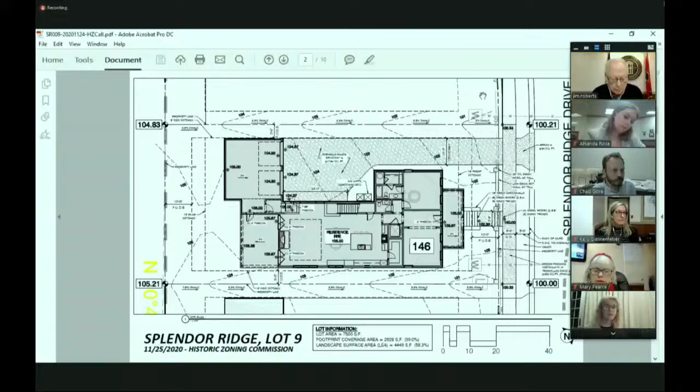I'll make a motion, this is Lisa. I move to deny issuance of a certificate of appropriateness for the proposed new construction based on staff analysis and recommendation dated December 14th, 2020. Is there a second to that? Mr. Chair, this is Brian, I second that.

Comments, questions? Mr. Chair, this is Mike - real quick, as I'm looking at this, I would agree with the applicant. I think in this case, if you look at this lot, it could easily be 30, 40 feet deeper, which would easily meet the 35%. And the perception when you're out there is that it's going to have that open space behind it. So I don't have a concern with the 39% in this case, and would support the application.

Thank you, others? Other comments? Mr. Chair, this is Ken - on sheet A4.1, where you transition from the masonry to the siding, I see hardly any plane change on that wall from the masonry to the siding.

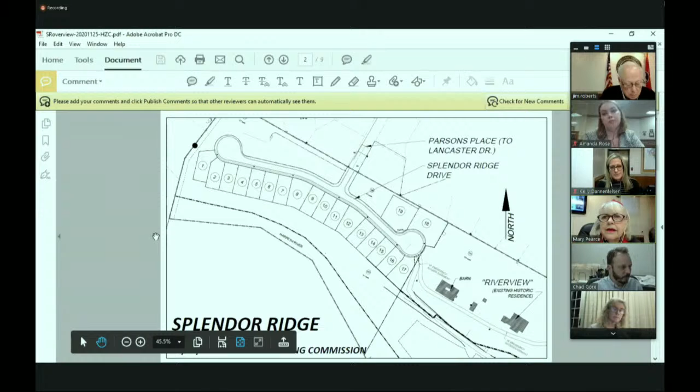And I'll add, while Chad is measuring, that the area you see in open space is floodplain, and the lots that are buildable are configured to avoid the floodplain, because new lots, as part of our city requirements, have to be outside of the floodplain. So that open space lot, it appears from the picture, is going to look like it has a lot of green space. I think the most sensitive lots are going to be 18 and 19, because they're closer to the existing neighborhood. So for that reason, I think I can support the extra coverage on the lots along the rear, 1 through 17.

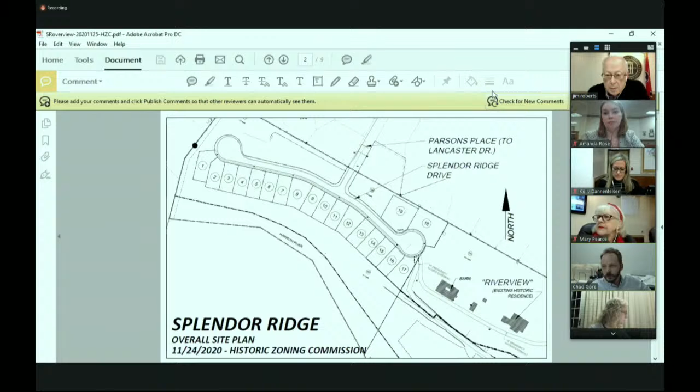And to jump in, I measured, again I'm doing this kind of quick, I measured 170,000 square feet of lots, 1 through 19. And there's a little over 400,000 square feet of open space. And I'm not counting the road in either one of those. Okay, all right. Other questions?

Just quickly, this is Lisa. Just to emphasize that our guidelines have the 35% recommendation for R1 for a reason. In this situation, even though I understand what the applicant is indicating, nevertheless I think it's important for us to keep in mind that in future applications, they will also be asking for that extra building coverage, which will then increase the entire mass of the development.

Thank you. Other questions or comments? I did want to note that Mr. Gore had mentioned the LSA requirements for the city. I just want to make sure everyone understands what that means. Landscape surface area. Yeah, please.

Yes, cover that. Landscape surface area is the percentage of area on any buildable lot that is pervious versus impervious. So with R1, it's a little more strict, the applicant cannot exceed 40% hardscape on the lots. The applicant is using some pervious pavers to help with the driveway, but I can assure you that no application can get a building permit if it's over 40% for the building itself. So that will help inform moving forward that, to Mr. Gore's point, no application would be eligible for a building permit regardless of historic zoning approval if it exceeds 40% buildable or enclosed hardscape area.

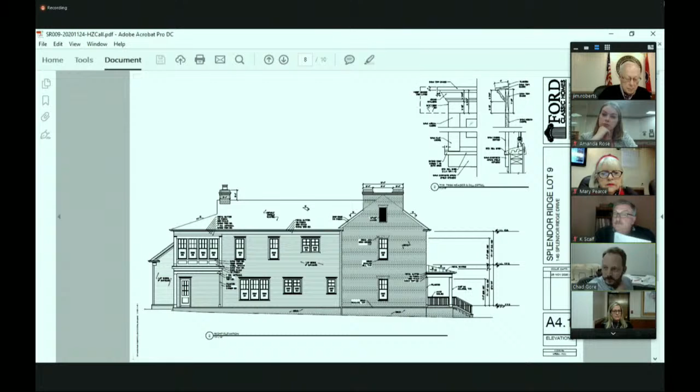Chad, would you mind explaining what this will actually look like, as far as the relationship of the siding to the brick, how far the siding will stick out beyond the brick? I think that would be helpful. The brick actually sticks out 3 to 4 inches from the face of the siding, so effectively there is a 4-inch outside corner there. The wall itself is in the same plane, but the outside face of the material has a 3 to 4 inch difference.

Does that help? Is that kind of what you were asking about? And that's the brick sticking out forward of the siding.

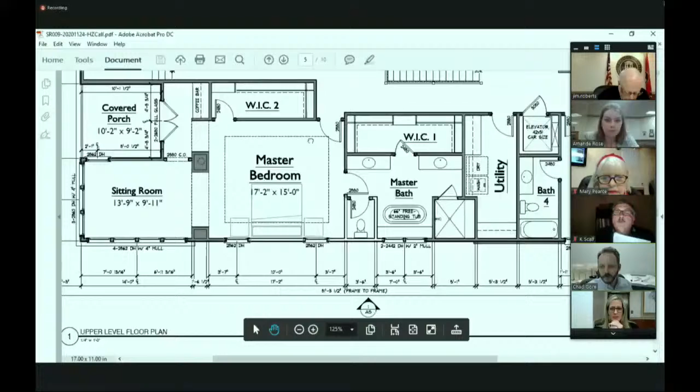Maybe you can go to the floor plan, sheet A1, and zoom in on the kitchen. Actually, it might be better on the second floor, by the utility room. You can see this very small offset, 4 inches, where the brick transitions to siding.

Okay, Mary, does that help? Yeah, I'd argue that if this were on the front of the house it might be a different condition, but it's on the side. We've had times where we've allowed just a piece of trim to create a break on sides, long sides, so I think you'll see enough of a shadow line that it'll appear as a break.

Any other questions? Sounds like we're ready to vote then. This is a motion to approve as presented, so please respond as I call your name.

Kelly Baker, aye. Susan Besser, no. Jeff Carson, aye. Mike Hathaway, aye. Brian Laster, aye. Carol Marquardt, no. Mary Pearce, aye. Ken Scalf, aye. And Jim Roberts, aye.

Okay, we're ready for the next one, which is lot 10.

So for the record, that was 7-2, passing, correct? Correct. That was for the amendment, correct? There were two different votes. Mr. Chair, when we approved it that way, did we include the staff comments as conditions? Yes, Ms. Baker did include the staff comments.

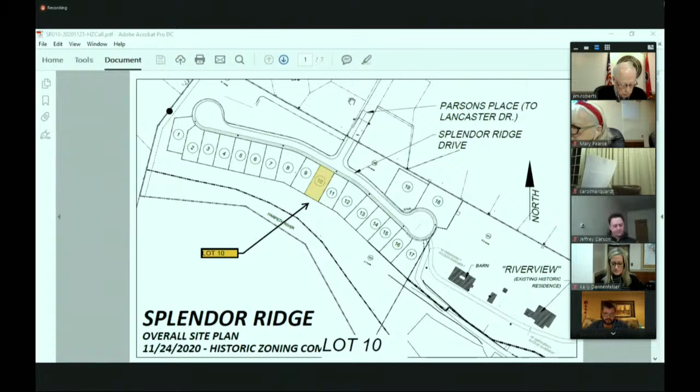Now go ahead and go to this view here. So the applicant's requesting a COA for construction of a 1.5 story principal structure with garage at this location, 155 Splendor Ridge Drive. This was not discussed at DRC. The applicant did bring forward an item for lot 10 at DRC, but after consultation with staff, opted to propose an entirely new elevation for this property. So while we did discuss lot 10, it was not this elevation set.

Again, all the preliminary COA conditions apply, with the maximum height of 39 feet and a 2.5 story scale.

At this location, the applicant's proposing construction of a Tudor Revival style residence with a cross gable roof form, a 2-bay porch which is partially uncovered. You can see the porch location here where this gentleman is standing, and the attached garage at the rear of the property. A 2-level porch is also proposed on the rear elevation.

Again, the setbacks are defined by the development, 15 feet in the front. The applicant has utilized a 1.5 story as viewed from the street, which is appropriate for the historic district. It's also consistent with the COA previously approved. The reason the applicant proposed an entirely new elevation set for this location is, as I showed earlier, this is a pretty pivotal location entering the development. It's really dead on with the intersection.

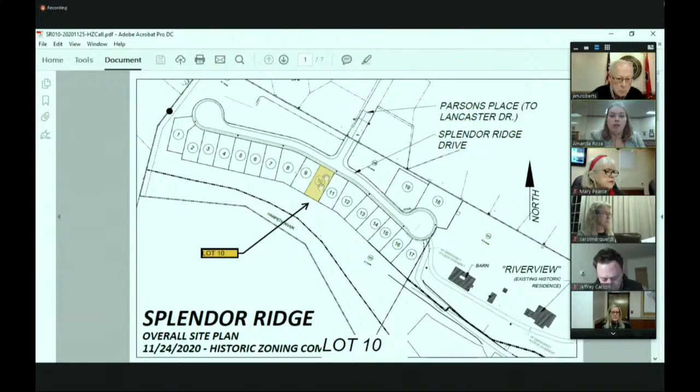With this being the highest point in the elevation, as I explained previously, the use of a 1.5 story at such a location helps lessen the perceived height as one enters the subdivision, and the implementation of the retaining wall at street level, along with the use of the porch, lessens the foundation height as viewed from street grade to FFE.

The materials of the proposed construction are listed as brick for the main front, lap siding with the side elevations at a 5-inch maximum reveal, iron porch posts, rails and spindles, wooden shutters, and asphalt shingle roofing. The brick, the lap siding, and the window specifications have not been provided.

The use of a smooth-faced cementitious board is appropriate; it just says lap siding. Anytime I mention that, it's because it doesn't specify Hardie board or wood. The proportion and rhythm of the window openings are consistent with the guidelines, which recommend maintenance of rhythm and spacing of adjacent structures.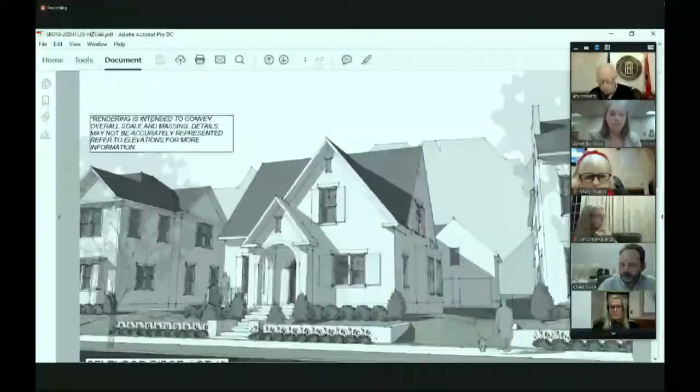I wanted to expand on what Amanda explained about submitting this new elevation. It wasn't an attempt to sneak one in, but I appreciate y'all seeing this without it having been at DRC. It has to do with hearing a lot of commentary from the DRC about making sure we didn't have a street full of fully two-story massing overpowering the street.

So I wanted to show some commitment to mitigating that as much as possible. If you remember, we talked about Lot 9 and Lot 10 at the DRC, and what we've really done is pushed the design from Lot 10 over to Lot 11 and inserted this Tudor-esque story and a half. After some studying, I was happy to find that we could accommodate that kind of massing and still get what we'd call a marketable house on these lots.

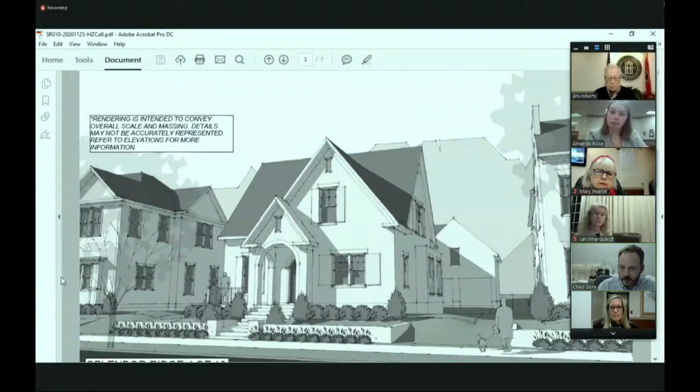We want to be able to do this, maybe 1 in every 3 lots. I wanted to make sure we got this shape of design in for you to at least comment on and hopefully approve, even though we didn't get to talk about it at the DRC. We're asking again for the exception to the 35% lot coverage for all the same reasons. Other than that, I'd be happy to talk with you about any questions you have.

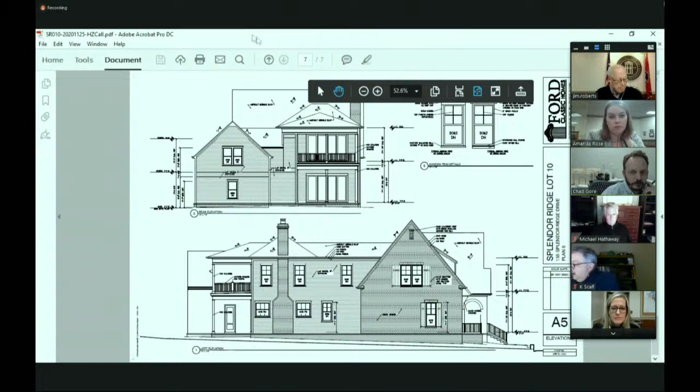Again, I think the way our upper level is designed, if we go to the A2, I think I can shrink the study flex room and the bunk room a little bit and bring that wall so that it's not stacked directly below. The bonus room would stay the same size it is, but I think I can help at least on part of that.

Yes, the change in footprint would be nominal, maybe an inch or so of setting - it wouldn't be something readily noticeable. We're really just talking about the upper level, I think. Right. And then would Mike concur with that change to the amendment? He would.

Mr. Chair, can you repeat the amendment? The amendment, as I've written it down, is to add brick for variety on the first floor only, on the left, right main mass, and the rear main mass. Is that what you got, Amanda? Everybody understand that amendment?

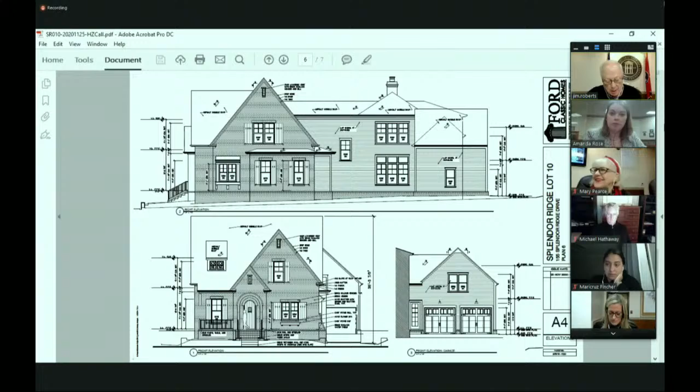Is everybody clear? Ready to vote on the amendment? Kelly Baker, aye. Susan Besser, aye. Jeff Carson, aye. Mike Hathaway, aye. Brian Laster, aye. Carol Marquardt, aye. Mary Pearce, aye. Ken Scalf, aye. Jim Roberts, aye.

So the amendment passes 9-0. All right, we're back to any more comments on the original application as amended? This is Susan. I would just like to comment on how well designed all three houses are, and even though I'm not supporting the lot coverage, I do support the designs. I want to make that clear because they've been really well done, Chad.

Thank you, Susan. Thank you, and that's a great comment. They are well done, well thought out. I appreciate the adjustments made from design review. Okay, any other comments on the main motion as amended?

Then let's vote, please respond when I call your name. Kelly Baker, aye. Susan Besser, no. Jeff Carson, aye. Mike Hathaway, aye. Brian Laster, aye. Carol Marquardt, no. Mary Pearce, aye. Ken Scalf, aye. Jim Roberts, aye.

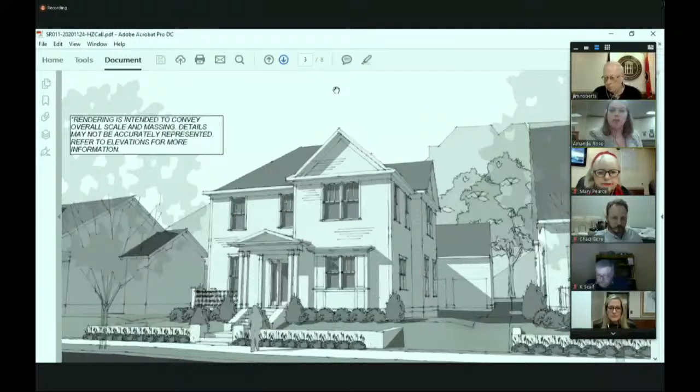All the previous comments apply as far as context and the preliminary COA as approved for height and scale.

The applicant is proposing construction of an asymmetrical colonial revival style residence at this location. This set of elevations was previously discussed at the design review committee, all for lot 10. As Mr. Gore indicated, it's now proposed for lot 11.

It has a hipped main roof, a front gable projection and box bay here. It also has side cross gables and a single bay pedimented porch located here, and an attached garage at the end of the driveway with a 2-level porch at the rear. Again, the setbacks are the same as previously approved.

The streetscape indicates from Mr. Gore's plan, which I do want to comment on, that the site planning information provided by the applicant has been very thorough. It made my role in reviewing much easier, and I really do appreciate that.

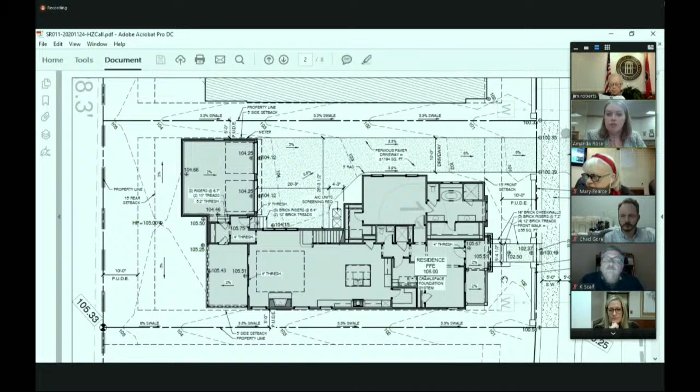It's very clear from the site plan that the elevation change is 6 feet from the street to the FFE, utilizing the 2-foot retaining wall and going upward. Actually, this one's a little less - I think it's 5 feet 5 inches from street grade. So the applicant's done a really good job of trying to mitigate the foundation height issue, given the topographical issues on the property that cannot be mitigated.

This proposal is more of a 2.5-story form. It might read as 2 from this street. It is appropriate for Franklin Road Historic District.

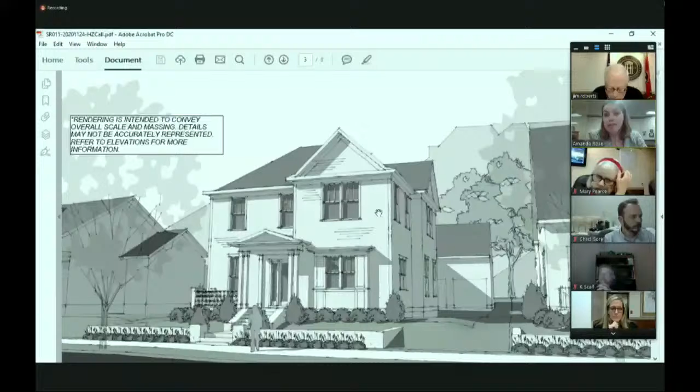The DRC did recommend that the applicant break up the roof line along the side elevations in order to lessen any perceived length and mass of the facades. I'm happy to report that the applicant did do that.

I'm going to pull up these elevation sets so you can see. This is the right side - utilizing the cross gables really does help in breaking up that massing. Again, this is right side. Here's the left side, so you can see that it does break up the facade quite a bit.

The proposed materials are listed as lap siding with a 4-inch reveal - this is a tighter reveal. The brick and split face CMU concrete foundations. The Fypon porch railing - Fypon is a material that's more of a composite material emulative of wood.

I did ask the applicant to provide more information about that, which I did present to the commissioners via email, and I'm happy to speak more to that if you would like.

A shaker style fiber cement panel that you see here at the box bay - I'm on the wrong elevation, right here at the box bay. And then asphalt shingle roofing with rubber roofing at the very top of the hip.

This is very flat, has very little slope. There's a rubber membrane proposed there.

The use of a smooth face cement board siding would be appropriate on infill construction. Porches are generally recommended by the guidelines to utilize wood, or use brick or metal if appropriate for the architectural style. The use of Fypon material must be considered by the Historic Zoning Commission for compatibility with wood, so I did provide that information so you can make that decision accordingly.

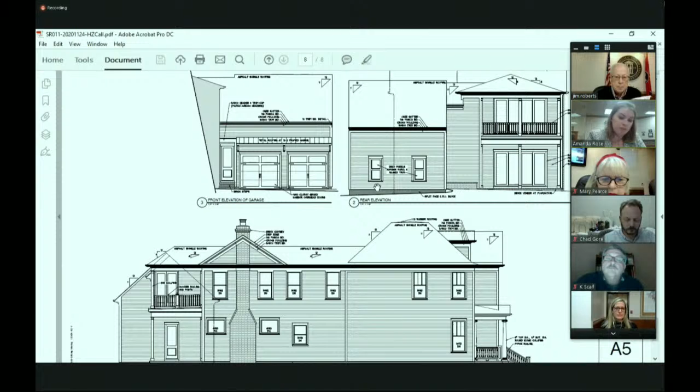The proportion and rhythm of openings are all consistent with the guidelines, as you can see throughout the elevation site. The applicant did add fenestration to the rear elevation per DRC's recommendation, as that elevation may have some advantage from the downtown side of the river.

Again, the design is entirely appropriate with the exception of this couple of items I noted. Staff is recommending denial based on the proposed building coverage, which is 39.3%, exceeding the maximum building coverage guideline recommendation of 35% by 4.3%. If issued a COA, the lap siding must be wood or smooth faced cementitious for consistency with the guidelines. Window specifications must meet guidelines, be submitted to staff for review and approval prior to permitting.

The brick color and texture for both the house and the retaining wall must also be submitted for consideration in light of the guidelines. And the applicant must either utilize wood for the porch railing or otherwise seek approval from the Historic Zoning Commission tonight for the use of Fypon. So I would ask that with any motion, the person making the motion comments specifically on that element.

And then the applicant must remove that metal awning over the garage doors and utilize either a heavy trim board or a light fixture, or any other element the Historic Zoning Commission may choose to request there. Thank you. Chad, comments?

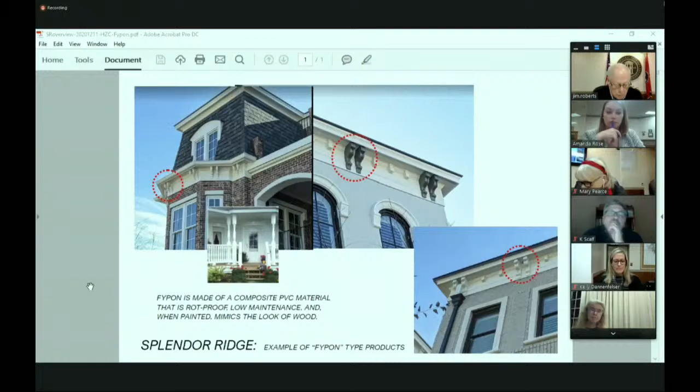I would like, as this project progresses, if we can talk about solutions other than those, just for some variety, since we're going to have the same garage sort of outbuilding on almost all these lots. So it's probably something we want to talk about doing a few different things than having the same treatment every time. It may be something I just work through with staff, redesigning that awning in a way that's more appropriate to the guidelines and yet still be some sort of awning, just as an alternative detail. But again, I'm okay with either one of the ones Amanda has suggested in this case. It just happens to be, I think, the same thing we're doing on the other two.

And then the Fypon, just in case some of you aren't familiar with the product, it's really made to look just like wood, paints up exactly like wood, and you don't have maintenance issues with it. It's not going to split and come apart and rot and fall off over the years, so it's something we use a lot. These are pictures of our projects, save the one with the actual railing, and we use it all the time, and it's pretty handy. So happy to answer any questions you have about it. It's not vinyl, it doesn't have a predetermined color and isn't shiny like vinyl would be. It paints up and really looks just like wood. So that's all I have. Thank you, I'll answer questions.

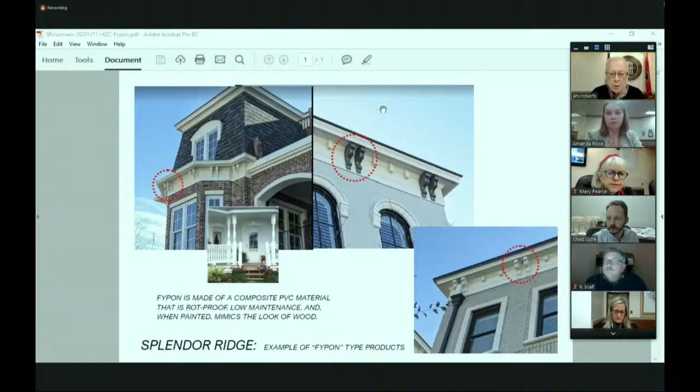Okay, any citizens with comment on this application? Otherwise, we'll take a motion.

Mr. Chair, I move to approve issuance of a certificate of appropriateness for the proposed new construction based on staff analysis and comments dated December 14th, 2020. Thank you, Kelly. Is there a second? Mr. Chair, I'll second, and I've got a comment.

Okay, would either of you talk about the Fypon? Well, I admittedly am not super familiar with the material since I am not in the construction business, but it does seem to me that this is a newer material that's possibly been created and introduced after the guidelines were created. And based on the information provided to us by Ms. Rose and Mr. Gore, it feels appropriate, especially considering this is new construction.

Okay, we'll just make that as an amendment when we get down the road here a little bit, if someone wants to make it. So Mary, you had a comment? Did you have another comment? I do. Go ahead. The drawing that we got, and then the drawing that's on A4,

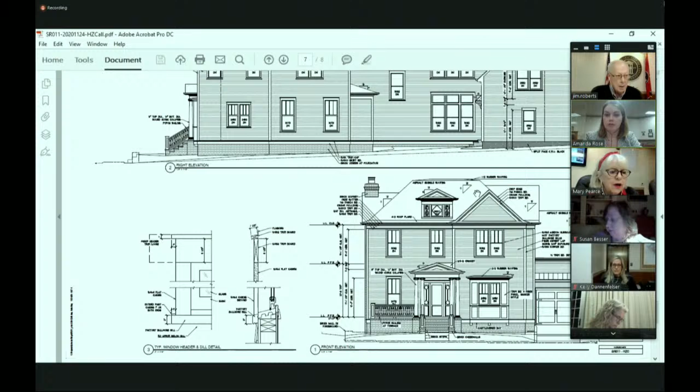Okay, anything else on that amendment? Just for staff clarification, when you say window configuration, do you mean the diamond shape in the center? Yes, it's too busy, that's what she said, not get rid of the dormer, the dormer is totally appropriate. I just wanted to clarify for the record - it's not about changing the configuration of the window, it's more about changing the detailing on said configuration.

Okay, we're ready to vote on that piece of the amendment. Just respond when I call your name. Kelly Baker, aye. Susan Besser, aye. Jeff Carson, aye. Mike Hathaway, aye. Marion Laster, aye. Carol Marquardt, aye. Mary Pearce, aye. Ken Scalf, aye. And Jim Roberts, aye. All right, that's an amendment.

Do we have another amendment as it relates to the, what do you call it, Fypon, whatever the product is.

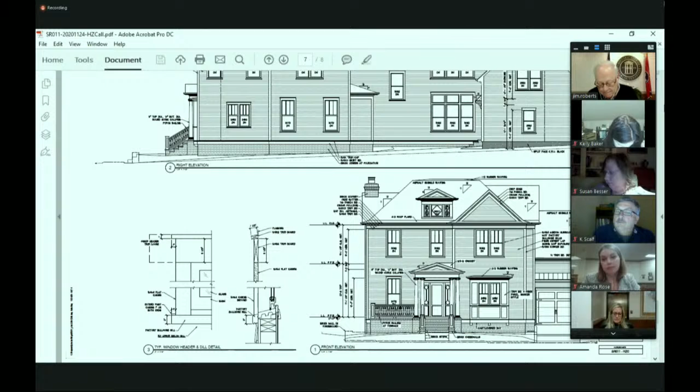Mr. Chair, my comment about Fypon would be that this is new construction and a new development, and I'm not sure it really matters that they use Fypon. One thing about what we didn't like about some vinyl products is the dimensions and scaling of it - this product tries to address that issue. That being said, I don't know that I would support that in the historic overlay for historic properties, but in this instance I would support it.

All right, thank you, you want to make that then? Are you making the motion on the amendment? Yes. Can I make a comment before we move on to the amendment? And that is, according to what was presented, the Fypon is also being used for the railing on the terraces, correct? That's right, that's what I see. Okay, thank you.

Okay, so Brian's got a motion to use the Fypon where shown on the drawings. Is there a second to that amendment? I'll second. Ken - what is that material? It's a composite, I want to say it's like solid PVC. You've seen some which makes it sound like plastic, but it doesn't appear to be a vinyl product at all. I don't know how to give you the chemical composition, but it's a solid product.